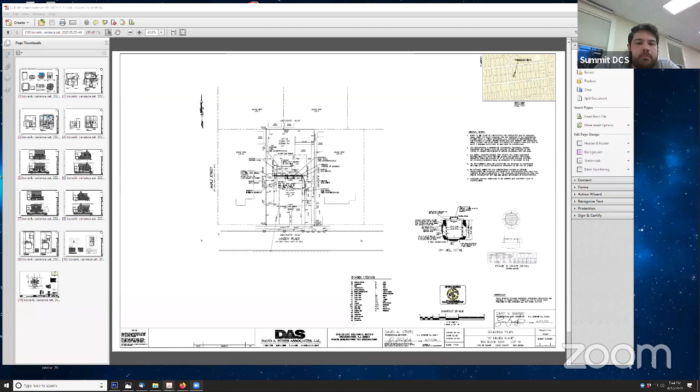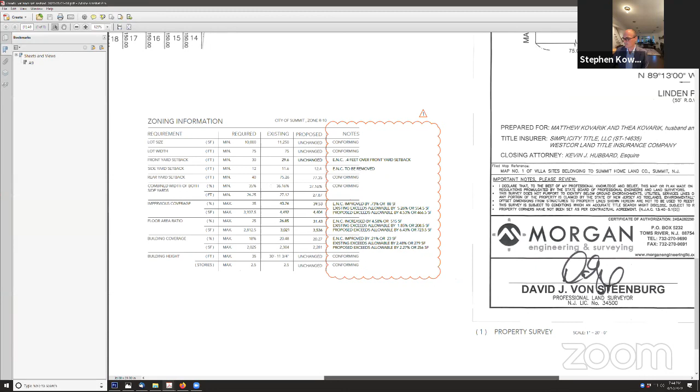Okay, yep. So I'm gonna start with just going through the variances. We did submit a revised sheet, which I believe was distributed to the board. This is page A9. And currently there are several non-conforming issues on the site. My previous plan did not note the extent of the variances, so this updated one makes that more clear. So if we start from the top, we're fine with lot size and lot width.

Front yard setback is currently 0.4 feet over. We're not making any change there. Krista mentioned in her review that we're changing the portico, but the portico meets the size threshold where that's not considered against the setback, so that remains. Side yard setback, existing non-conforming to remain.

Conforming on rear yard and combined side yards. Impervious coverage is existing non-conforming. We're improving that by a small margin in terms of coverage, but we're actually making a drastic improvement by providing an underground stormwater management system, which is not required. You'll notice that in the engineer's report asking for calculations - we did that as a benefit to the neighborhood. The roof area actually decreases, but as a benefit to the neighborhood, we're proposing stormwater management while decreasing impervious coverage. Floor area ratio is one that we're increasing by 4.58%.

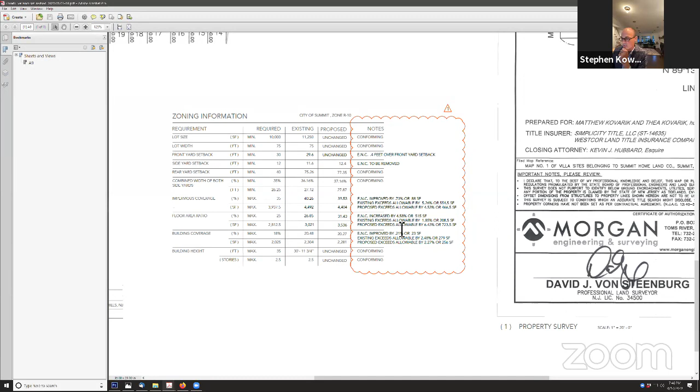Which will exceed the allowable by 6.43%, or 723 square feet. As Mr. Kovarik mentioned, there's an existing one-story addition, very out of keeping with the neighborhood in terms of aesthetics. So what we're proposing to do is go up and over that, making the addition much more traditional and in keeping with the neighborhood. But as a result, that does increase the floor area. Building coverage, we're also improving slightly by taking off some unsightly appendages from the side of the house. So the only variance we're requesting is the floor area ratio.

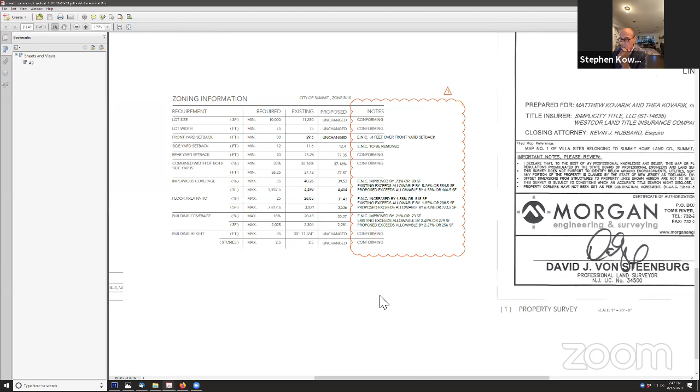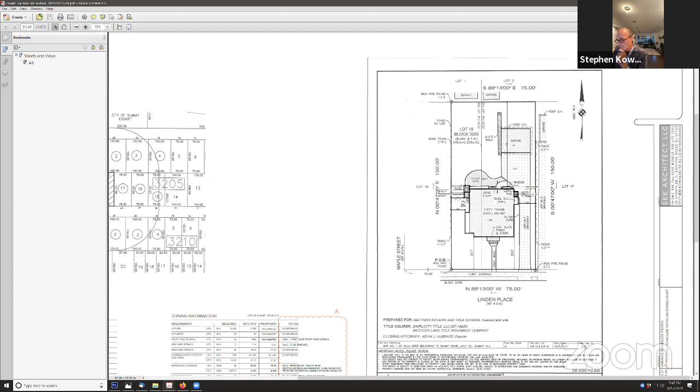If I zoom out on this page - well, the site plan, which you can see here, shows the front yard setback existing non-conforming, and the rear patio, which we're removing and replacing. Let me bring up another page with the photos. So in the neighborhood there are a number of colonials. Here is the one-story addition on the back of the property - really not at all in keeping with the character of the neighborhood. You can note the vinyl siding, also not in keeping.

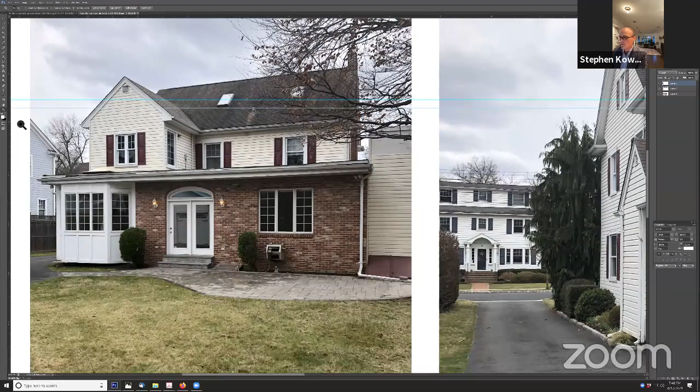Really, our feeling is that by switching from this existing to a much more traditional proposed design - and if we look at the front of the house here, the portico is very poorly proportioned. We're doing something much more in keeping with the style of this age house, actually similar to the neighbors, but with different proportions.

And really looking to improve stormwater management and also the aesthetics. Our feeling is that these improvements will drastically outweigh the detriment and be a benefit to the neighborhood.

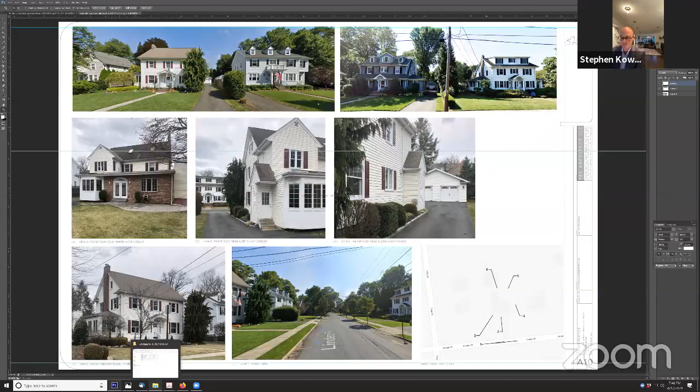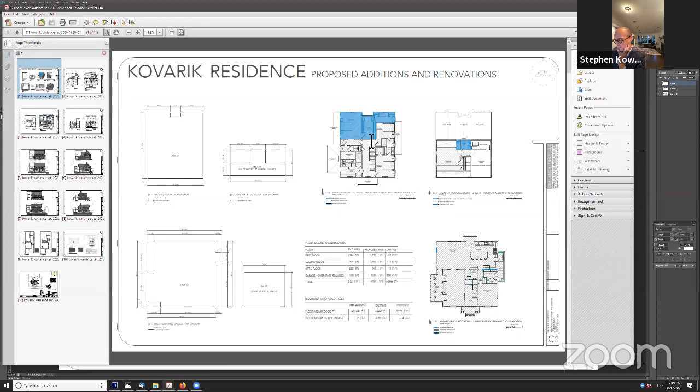If we switch to the plans, I'll quickly walk you through existing and proposed. These were the floor area ratio calculations for Krista. You can see here in the small version, the key plan, existing one-story area that's going to get filled in on the second floor. To the plans in particular, first floor plan, again, this portion here, existing one-story. In my plans, the blue walls are new, some minor reconfiguration on the front entry hall. And the back will become a kitchen open to the family room. That's the extent of the work.

Mud room that we're adding to the side, which improves a pretty unsightly condition, which we'll see on the elevations. And also you can see here, there's a Bilco door and a very strange bump out, just a bad appendage to the side of the house that we're going to be removing on the west side.

Second floor, where the bulk of the work is being done, there's an existing odd narrow bedroom on the back of the house, one shared bathroom for the kids, another master bath and a very small closet. The proposed is a new bedroom, which will go in the back, larger closet, slightly larger bathroom. We'd like to get a laundry room on the second floor, and basically shift this existing bathroom or bedroom back a bit in order to get a new bath, Jack and Jill for the kids.

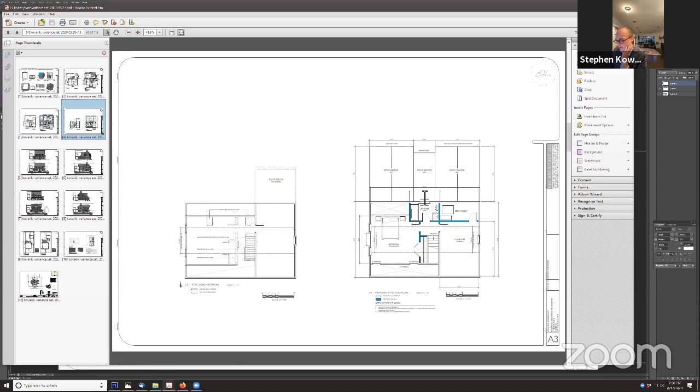The third floor is already finished. It meets the code in terms of being less than 1/3 of the area of the floor below. We're proposing to make a guest bathroom and bedroom on the third floor. So very small work, just a minor dormer out the back on that.

Going through the elevations, existing front, if I zoom in a little bit here, you can see a fairly poorly proportioned portico, some really bad details on that. What we're looking to do, first and foremost, remove the vinyl siding. On the historic notes or the architectural notes, I was very pleased to see a request for not textured. We never specify textured Hardie, so the new HardiePlank will be smooth, look much more like traditional clapboard. And then looking for just a better proportioned flat, and instead of having a very shallow roof shape to avoid this window, we're going with a flat roofed entry portico.

On the side, west side elevation, not much changing here aside from this ugly appendage that apparently was supposed to be a chimney, didn't get built as a chimney, became a closet that extends up above the flat roof. Very unusual, so we'll be taking that off, cleaning up this side elevation, adding some detail to the sunroom on the side, some columns, and again, simplifying the portico or improving the portico.

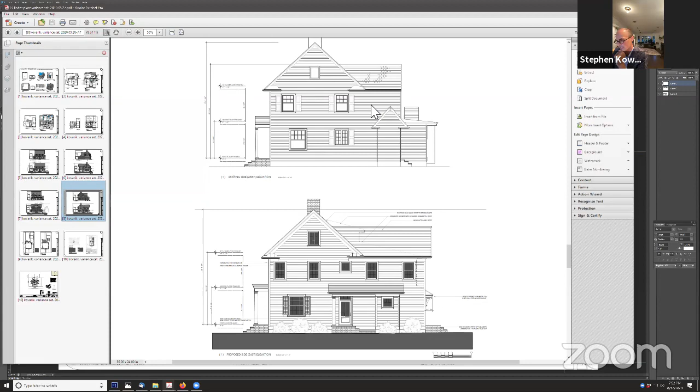And then again, this thing is quite bizarre. On the west side, we have a very unusual little side entry roof, asymmetrical. We're taking that off, extending it over, converting this window to a new mudroom entrance.

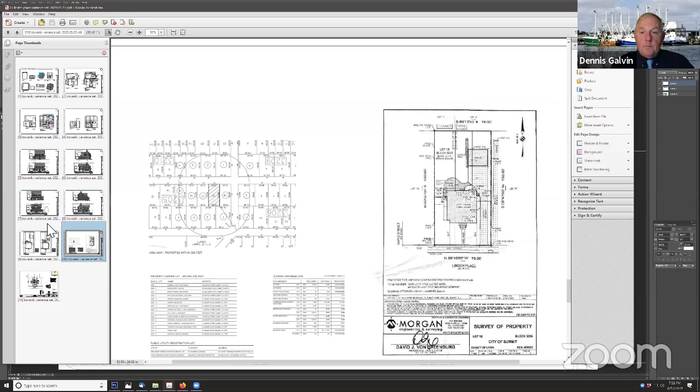One thing that—go ahead. I'm out. Mr. Spurr? Yes, what do you think? I think we've had a thorough explanation so far. You want to keep going? Yeah, that's the end of it. There's anything further I just wanted to talk about some variance screening.

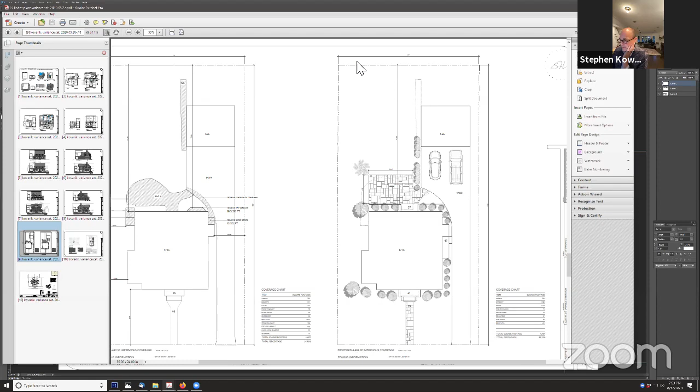That'd be helpful to wrap this up, and then we'll open it to our board professionals. The last thing that I wanted to mention is Krista mentioned that there was not coverage calculations. It may have just been the order of the pages. Those were included in the set distributed on page 9. And I did want to note, we have some photos—the Kovariks, since they've moved in, have planted some substantial screening already in the back of the house. Got a good report from the city forester, right? Yep, so I think that pretty much explains it.

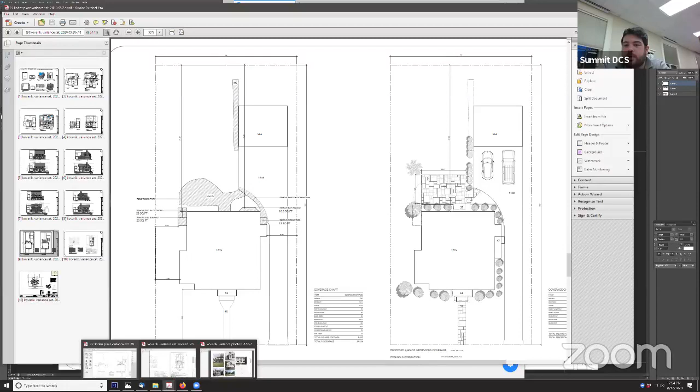Let's start, Mr. Dow. Anything you want to follow up regarding this application? Well, I guess the question is if the applicant is willing to comply with the engineer's report. There's a question regarding calculations, the comment about the overflow out to the street, which we didn't recommend, and the question regarding screening of the AC and generator units. I think that was probably it.

Kowalski, do you want to address those questions? Yeah, we're willing to comply with all of those. Okay, I have nothing further then. Thank you, Mr. Dower. And Mr. Galvin will note that as a condition of the application.

Any questions from board members of this witness? I got that, Mr. Chairman. Thank you, Mr. Galvin. I just have one question, Yuko.

Mr. Kowalski, you anticipated almost all my questions, but regarding the forest report, he comments about the location of the dry well being within the drip line of the neighbor's beech tree, and asked if that could be relocated to avoid that conflict. Is that something? Yeah, absolutely. That's a beautiful tree, and we certainly don't want to hurt that. So we can shift the dry well north to the side of the garage.

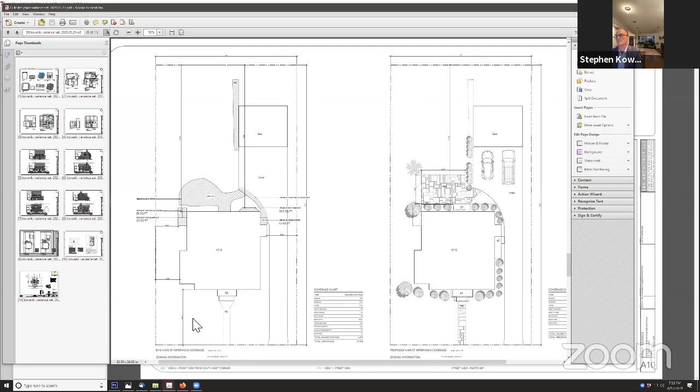Okay, thank you, excellent. Any other questions from the board? Hearing and seeing none. Are there any questions from members of the public? I don't know if there's anyone in attendance. Okay, seeing and hearing none.

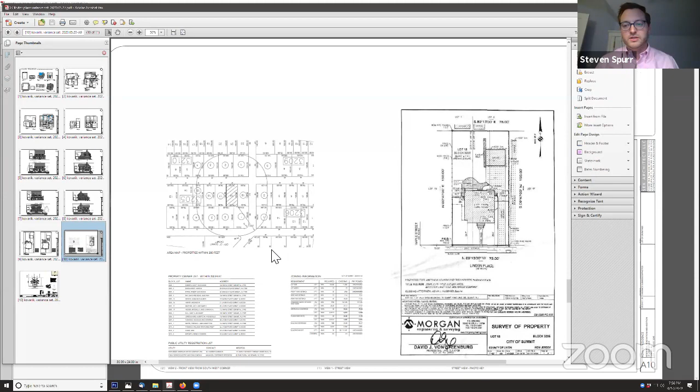Excellent, we can shift now to the applicants if they'd like to provide some testimony to conclude the case. Wait a minute. Well, go ahead, Mr. Galvin is shaking his head no.

What would you like, Mr. Galvin? Kovariks can close. Go ahead. Yeah.

Thank you for your time, and we hope you look favorably on our application. Thank you very much. Excellent. Thank you for your good close there.

Before we proceed to executive session, Mr. Galvin, will you just remind us of the conditions? I have the engineer's letter. We got three. Let me do it, Mr. Chairman, don't worry about it. Thank you. We got: the applicant will comply with the board engineer's letter dated April 14th, 2020. The applicant will employ Hardie board material for the facade as described by the applicant at the time of the hearing. And three, the dry well is to be moved to preserve the beech tree on the neighbor's property.

All right, thank you, Mr. Galvin. All right, wonderful. Now we can proceed to our deliberations. Would anyone like to kick us off?

Oh, Mr. Yuko, you're welcome to, but you got to unmute first. Trying. Thank you. I really like this application. The architect noted some of the unusual, I guess that's a nice word, features of the house, which it looks like they're going to fix. The addition, I feel, is modest in contrast with what's going on in the neighborhood. The variances are, you know, not that significant, and in fact some of them are reductions of existing things. So I'm in favor of it.

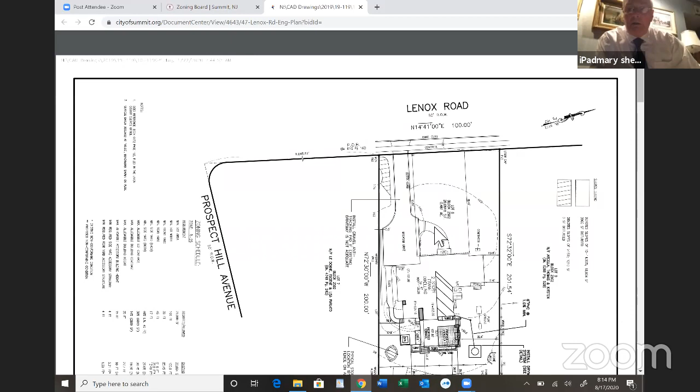All right, the plan is up there, Mr. Hollows. It's moving around. Chris, there we go, yeah, that's good. Good. The subject property is 47 Lenox Road.

It sits between Prospect Hill Avenue and Whitridge Road. It contains 20,064 square feet, 100 by approximately 200 feet deep. It is improved with a 2-story frame dwelling, a paved drive, a slate terrace, and a shed in the northeast corner. The property slopes from Lenox Road to the rear of the property, with a 6-foot fall in that span.

Along the property line there are some steep slopes. It is not in an area where we're proposing to do any improvements or land disturbance at all. You can see from my drawing, to the rear of the house is a proposed terrace. That seems to cause the problems as far as building coverage and variances required for rear yard setback and overall building coverage. It consists of a pergola, a spa area, and kind of an open area. The shaded areas you see on the drawing are proposed additions to the home.

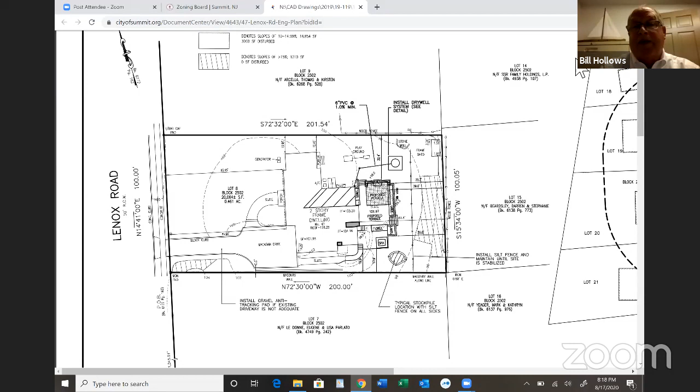Dewar had included in his letter, which I'd say is a 2020 requirement, that dry wells come to the surface with a manhole. So we would revise the detail for that.

All right, final question. The grade change on the lot necessitates the raising of the terrace, is that correct? Yeah, that'd be one way to look at it, certainly. The only other way would be to have a lot of steps coming out of the house, and that just doesn't let the house flow to the outdoor living area.

And if the terrace as proposed was on level ground, it would not be included in building coverage, correct? That's correct. And it would not be included in the rear yard setback incursion, correct? That's correct. And the house as it sits there does not violate the rear yard setback.

Mr. Hollows, is it fair to say that from an engineering perspective, the front yard setback is substantially greater than the front yard setback required at 35 feet? Yeah, it's more than double.

I have no further questions, Mr. Chairman, subject to examination of the board. Thank you, Mr. Sheehan. Mr. Dower, any follow-up questions for Mr. Hollows? I believe he's addressed everything in the letter, so just making the letter a condition of the resolution would be fine. That's acceptable to the applicant.

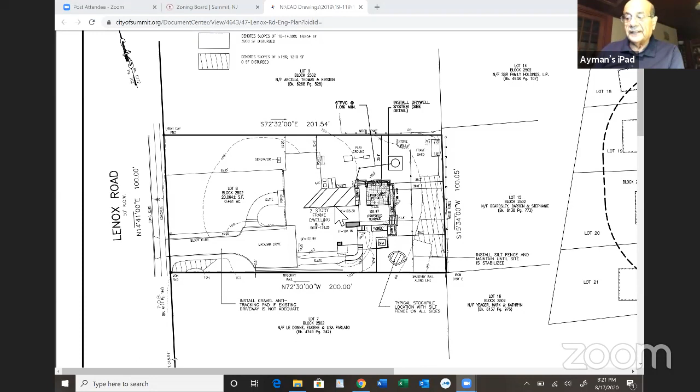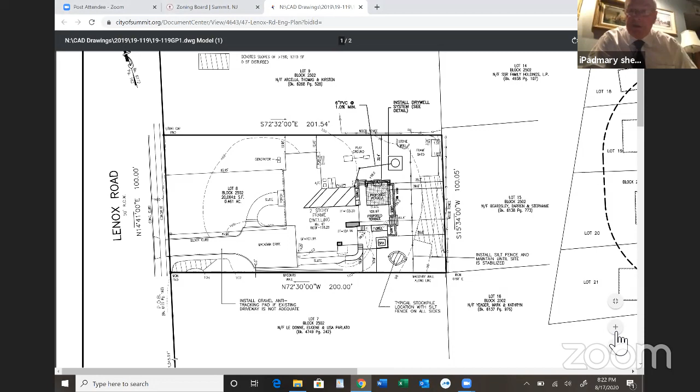Yeah, Mr. Malay, the setback is proposed at, bear with me a second, at 35.9 feet. The actual existing non-conforming setback is 39 feet. So the setback is being reduced. The setback variance non-conformity is being reduced by 3.9 feet.

That's not what I read in Krista's letter. No, I think as I read it, she indicates the rear yard setback proposed, well, she is not reading the plan accurately. You're reading her letter accurately, but the actual setback as it currently exists is 39 feet. The proposed setback, and Mr. Hollows can correct me if I'm wrong, is 35.9 feet. So it increases the rear yard setback.

Actually, it decreases the rear yard setback. But what's happening here is that the patio itself, or the terrace itself, is at 39 feet. That extra 3.5 feet or so is a planter that runs along the rear of this terrace area.

So, Mr. Sheehan or Mr. Hollows, how should the variance read, or can you simplify this for us if there is some ambiguity or, God forbid, an error on the part of Ms. Anderson? Bill, for the record, describe the existing rear yard on your plan and the proposed rear yard.

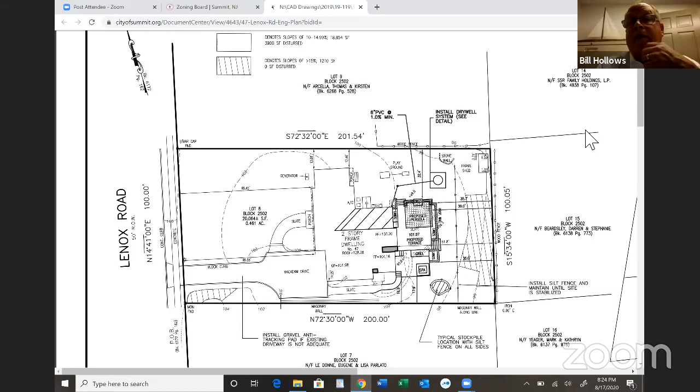The existing rear yard that we have is kind of a circular terrace. It's hard to see on my drawing, it's a dashed line. It comes out to 35.9 feet. The proposed terrace itself is at 39 feet. The planter is at approximately 35 feet, very similar to the 35.9 feet. So you've got a planting area to kind of screen the terrace a little bit from the neighbors.

But that planting area is not technically part of the intrusive terrace, is it? No, I would say not. Again, it's something for aesthetics.

And doesn't Krista's report say the rear yard setback? Mr. Upton, can you keep your head up when you speak? Because when you look down, your voice lowers. Sorry. Krista's report does say that the rear yard setback proposed is 39 feet. So isn't that accurate? Isn't that the accurate number?

Krista says that it's 39. Isn't that what Mr. Hollows just said? Yeah, Mr. Yuko, what it is, it's 39 to the terrace itself. It's 35 plus or minus to the planter area that is adjacent to the terrace. And the planter area is not contemplated as being in violation of the rear yard setback requirement, so the existing rear yard setback proposed is 39 feet, which increases it from the existing 35.9, 35.9, right?

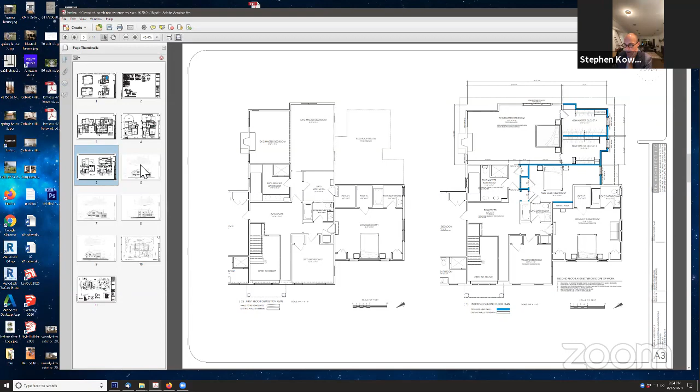Again, the bulk of the work is on the second floor. We're filling in over the one-story space, adding a new closet, and a small office slash guest bedroom on the second floor. The front of the house is staying as is.

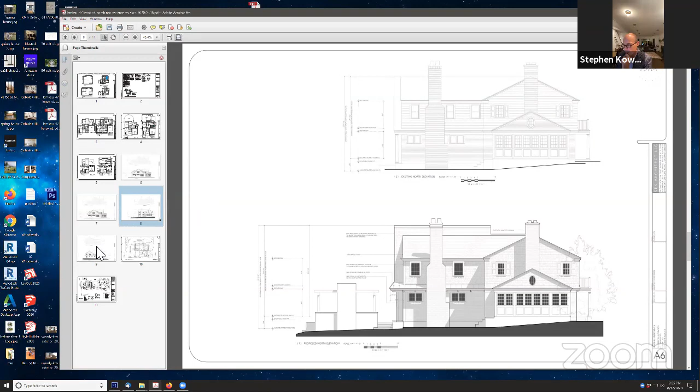From the side yard, again, there's a slight unusual low extended asymmetrical slope here. We're cutting that off to make it a more symmetrical gable, and then adding a shed dormer on the side for the bedroom.

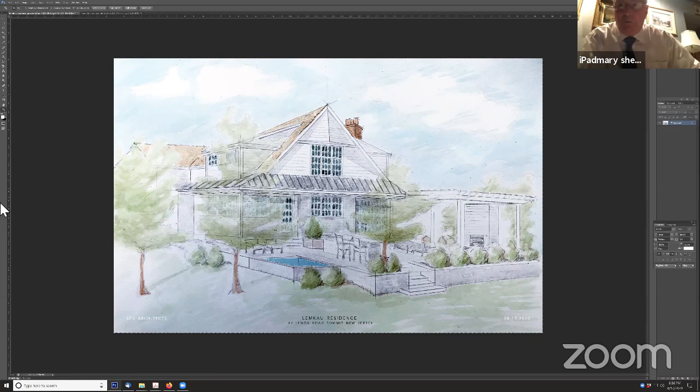If it's okay with the board, I would like to introduce a perspective that we didn't include in the previous correspondence. This will have to be marked—that would be marked, Mr. Nicola, A1. Well, A1 was actually the photo sheet that Mr. Kowalski prepared, so I would mark this A2.

All right, thank you. So again, just to give it in 3D—it's always a little bit easier to read an idea of what the new, more symmetrical facade will look like.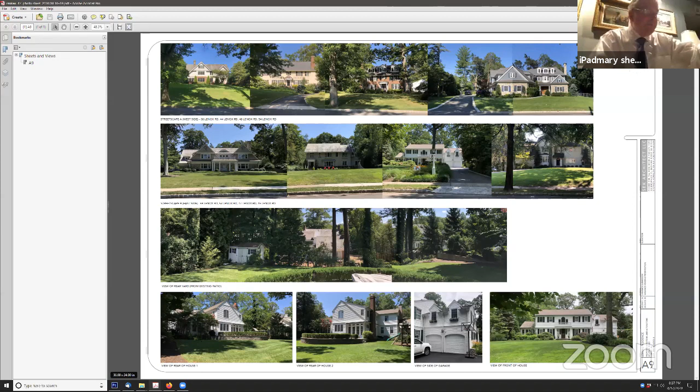And that's it. I have no further questions of the witness and would submit them to the examination of the board. Mr. Dower, any questions for the architect?

None, Mr. Chairman. Thank you. Questions of the board for the architect?

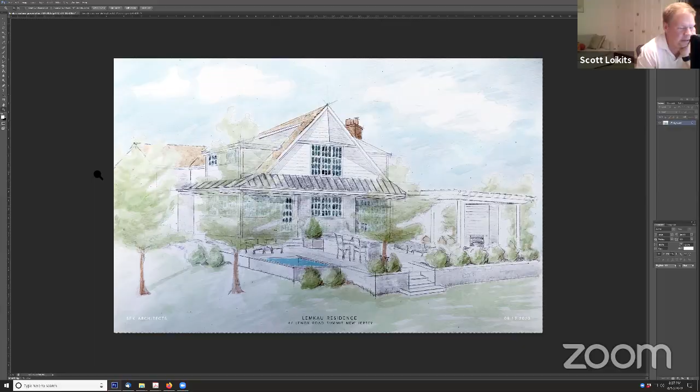What is the cladding for the proposed addition and changes to the side and rear of the building—is that going to match the existing on the front? It will. It's natural cedar. It will match.

Okay, any further questions for the architect? All right, hearing and seeing none. Any questions from the public? Again, it doesn't look like anyone's joined.

Mr. Sheehan, would you care to proceed to your next witness? In the absence of any questions that the board might have with respect to the landscape plan or the terrace plan proposed by Jared Kest, I have no further witnesses, but Mr. Kest is logged in and available to respond to any questions, should there be any.

Pause for just a moment. Were there any questions regarding landscaping? Would we like to hear testimony from Mr. Kest? A question to the board. Hearing, seeing no interest. Thank you, Mr. Sheehan, for bringing Mr. Kest along with us tonight.

All right, thank you. Mr. Chairman, the improvements proposed by this application advance the purposes of zoning in that the proposal creates an enhancement to an existing established permitted use, the advancement of the general welfare, the provision of sufficient space in appropriate locations for a variety of residential uses, and brings the property into the current custom and vogue of the neighborhood, as approved by Seacone versus Franklin Lakes, 223 New Jersey Super 199, Appellate Division case of 1988.